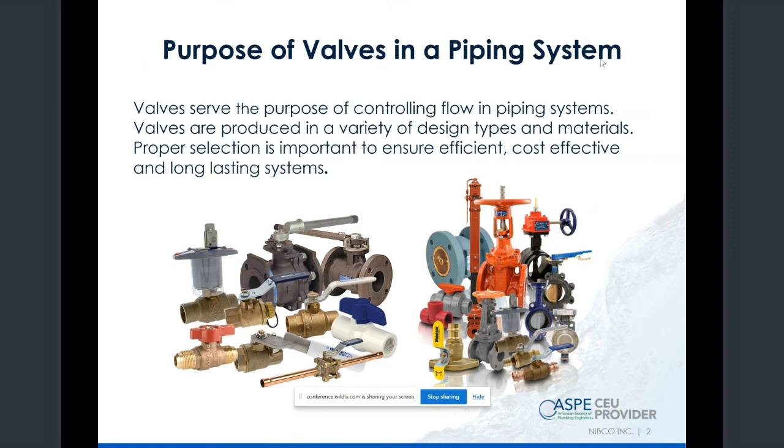All right, so purpose of a valve in a piping system. You can't just say this is a valve, and this is what a valve does - valves have a tremendous range of possibilities, procedures and capabilities. But if you're going to throw just a moniker on it, the purpose of a valve is to control flow, to control or manipulate flow in some way. So when a valve is in a pipeline or a line of any kind, there's a specific reason, and overall its process and purpose is to control the flow in one way or another.

So when we're asking about a valve, someone says, hey, I need a valve to solve my problem - this gets you about 95% of the way home. So what are the principal functions of a valve?

So what do we mean by controlling the flow? We're either talking about starting and stopping, on/off - you need it to start the flow and stop the flow. Do you need it to regulate or throttle? You'll hear the term throttling, regulating, or balancing. Are we trying to fine tune the flow, dial in the flow? Are we trying to take 20 pounds and turn it into roughly 5 pounds, etc.?

Are we trying to prevent the reversal of flow? Are we trying to make it so it goes this way, but doesn't come back into our fresh drinking water systems - checking the flow? Or regulating or relieving - so a relief valve, are we looking to relieve the pressure, to make sure for a safety procedure, to drain at a certain point in time, or control? That's how we would break it down if we got a few more sentences out of it.

And then the most important thing is service consideration. So once we've identified what you're looking to do with this valve, now we need to ask the most important question: what's going through the valve? What's the pressure, temperature, and media? That's the most important three questions you could ever ask about a valve.

What's the pressure, temperature, and media? How intense is it? So that narrows it down. This is a 3,000-pound gas transmission line. We're out, so now we know exactly where we're going. This is a potable water line for a residential house, just 60 pounds coming in.

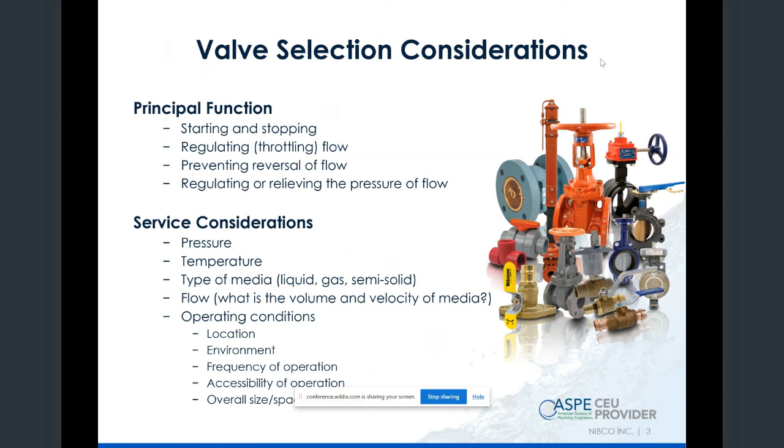So what we're going to talk about: ball, butterfly, bronze and iron, or what's grouped in as multi-turn. And then we'll briefly go over the discussion in conceptual terms of industrial fire protection. Press is in there for a specific reason, not only to bring to light that a lot of valves are adapting to press, but more importantly to understand additional questions and focuses we need to do when it's a press system.

So kicking off with the ball valve. What is a ball valve? It's a quarter turn valve with a closing member and a rotating valve, so a ball. It's almost as true as it says—there's a physical ball inside of the cavity that has a port, and it opens and closes.

This came into the market, I believe, in the space race era of the 60s. Valves couldn't always be just one thing—on, off, starting or stopping—with long material, long stems. So all that came out as a way to more manipulate a flow, create a more compact design, and be able to change out some seats for various services a little easier than its predecessor, the gate valve. The biggest thing about it is this quarter turn operation.

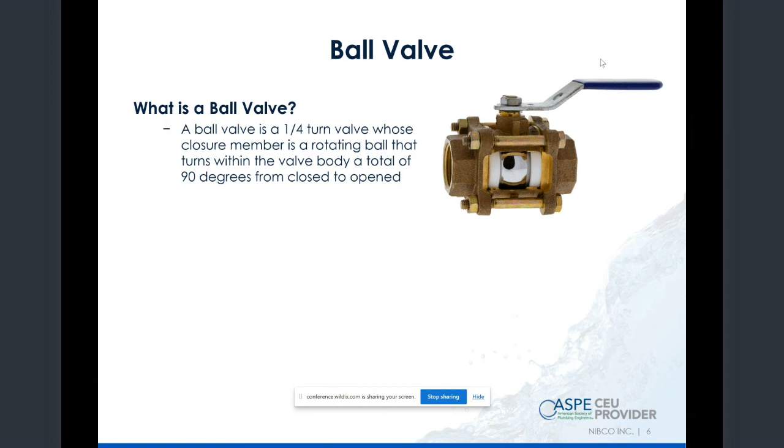So they needed easy on, easy off access as opposed to the previous, what they call a multi-turn. It did bring a lot of features, and we're going to talk about that. The ball valve gets the most attention in this because it's probably the most manipulatable valve out there, so it gets a little more credit and time than its buddies.

So applications: pretty much across the board. You're going to find ball valves in the majority of applications wherever piping is involved—commercial, residential, industrial, isolation, blow off, air lines, med gas, cryo. You find ball valves pretty much anywhere piping is involved.

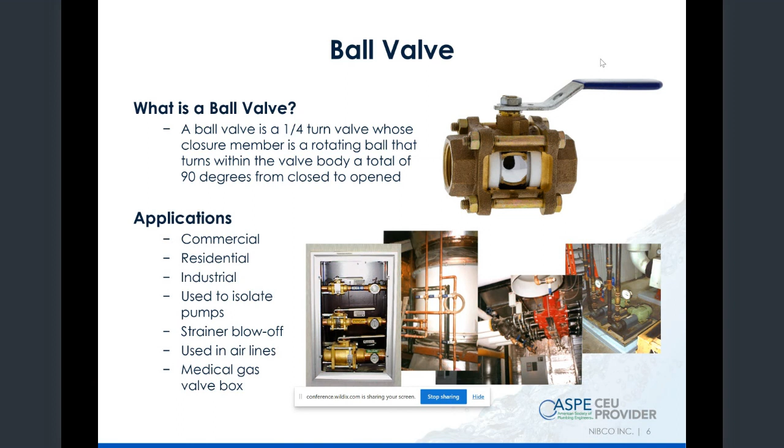So the features and the benefits: the body is probably the biggest thing. Because the physical amount of material required was reduced so dramatically, they could get a little more creative with the alloys.

Now, the most common are still going to be brass, bronze, lead-free bronzes, carbon, and stainless. But the ball valve, you can find it in Monel, Alloy 20, PVC, CPVC, plastics, high chem. So it kind of opened up the world to now make a valve to suit the service, as opposed to hoping the service can handle a valve that's already existed.

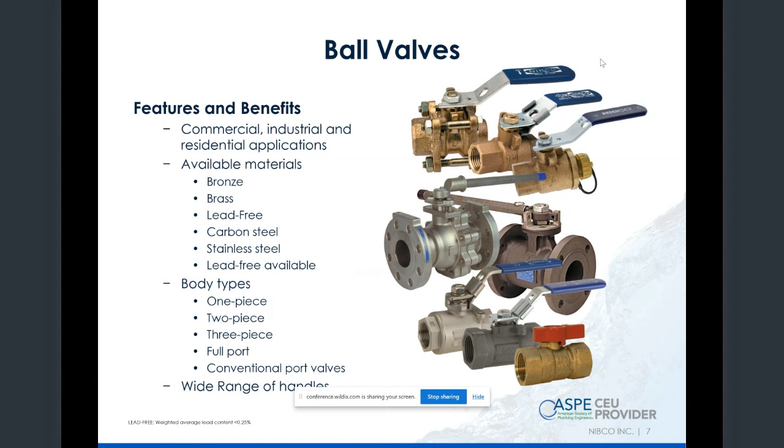Then we're going to discuss the body types. They make them in 1-piece, 2-piece, and 3-piece designs. So we're going to hit on that, and this is where you kind of pick up the why. Why would somebody ask for that? Is there a reason, or is it just because it's worked for 60 years and they don't mind if it changes? So, features.

Low pressure drop. So when we're looking at flow, the term you'll hear is full port or full flow. That's when the line size, the ball, and the port size are the same. Very low pressure drop when it comes to a ball valve. It's full port, full flow.

So your media, once it's open, the ball kind of blocks your cavities there. So you're really not eliminating too much flow. It's great for low pressure drop applications when flow is essential. It's a compact design with a lower flow profile. It's got ease of actuation, and it took away a lot of space installation requirements.

And bubble tight shutoff. Another thing it achieved - an interesting fact about valves is there's a significant amount of valves that are actually allowed to leak. Now, you'll never have a valve that's allowed to just stream out. Oh no, that's not a design feature. That's not the case at all.

But a lot of the old valves in high, severe service, it's a metal to metal seat. Now, inherently, because you have metal going right into metal, it's very difficult to achieve a complete shutoff. So what they call it is bubble tight, or a bubble allowable leakage rate. It'll be just small bubbles over a small period of time. It's never a flow by any means.

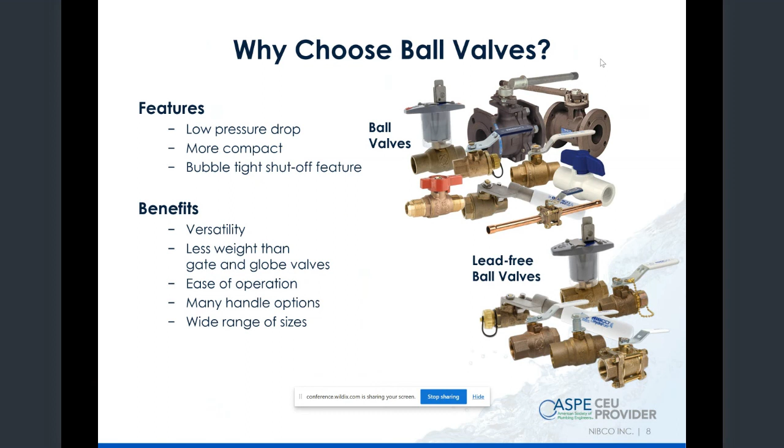It's versatile, low weight, ease of operation, handle options, wide variety. And then another thing a ball valve kind of created inherently is its own position indicator. Another great feature of a ball valve - it's very easy to identify if it's on or off.

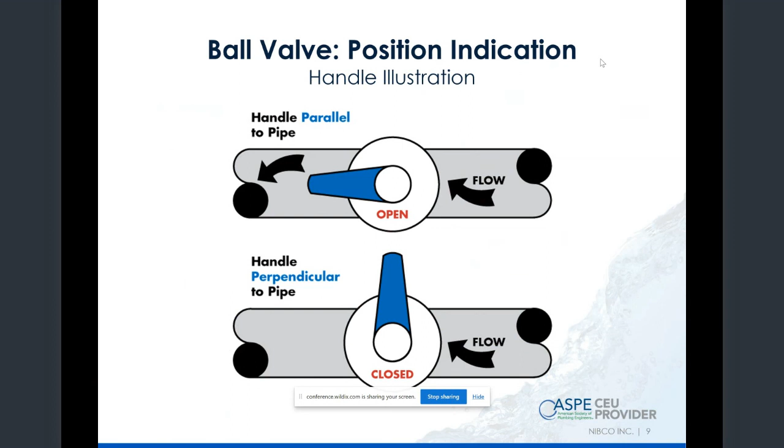If a valve - they always say the valve or the handle identifies the flow path. If it's on, it's parallel with the pipe. If it's closed, it's perpendicular. So immediately, especially in situations where it's essential to know if a valve is on or off, you're looking up in the ceiling - that's nice. It's a nice feature, kind of a built-in position indicator.

So on this side, we've kind of talked about this - port sizes. Full port: 2-inch line, 2-inch port, 2-inch flow, absolutely no obstructions. That's called full port. Full flow and full port are fairly synonymous, but the true port size itself is when the ball of the valve, or the flow path of the valve, matches or exceeds the line size. So no obstructions - full flow, full port.

Standard port or reduced port would mean that, to either save space, money, or just achieve a different body style, you're going to have a ball or a port that is 1 to 2 sizes lower than your pipe size. That's called a reduced port. In residential and plumbing valves, they kind of default to full port. But when you're talking about a 3-inch or 4-inch, or getting into the trunnion world, taking down a 4-inch stainless steel ball to a 3-inch stainless steel ball saves a tremendous amount of money and space.

So it's not that flow has to be full flow, or that we're sending a cleaning device through the line that absolutely has to not be obstructed.

Standard port is a pretty good option to save a little bit of money and space or design features. So when you hear port, knowing your line size is one thing, but what's the port? What's the flow path of the valve? Is it the same, or is it full or reduced?

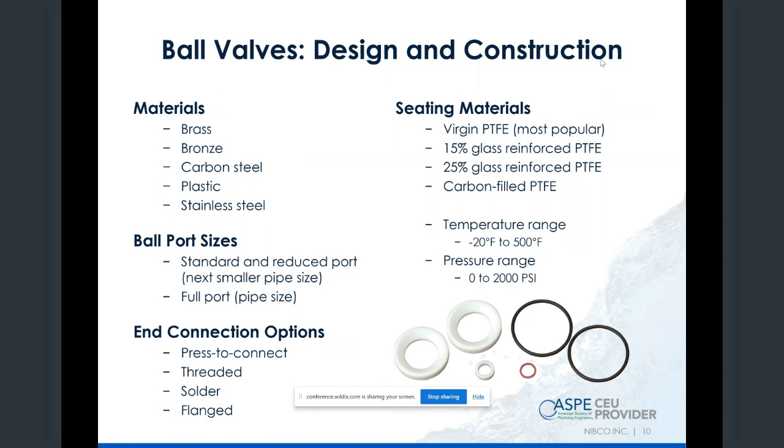Because ball valves are so versatile and interchangeable, we can achieve a tremendous amount of temperature ranges - that's like a standard range, but we can go all the way down to cryogenic, -300, if we need to. Pressure ranges are most of the time going to be 0 to 2,000, but when we get into more industrial valves, we can easily achieve 5,000 pounds with a ball valve, 10,000 pounds in some cases, especially for small instrumentation valves, etc. So the ranges get quite a bit, but you've got to make sure you have the right combination to get there.

So I mentioned trim - trim is the overall grouping of what we talked about. What's your ball made out of? What's your stem made out of? And what's your seat made out of? Most of the time, especially in the Nibco world and the commercial and residential space, we're either asking: do you want standard trim, lead-free trim, or stainless steel trim? That's the vast majority of the trim codes we're talking about.

Now if we get into trunnions or gate valves, or especially the forged small diameter gates, welded checks, then the trim combinations become astronomical. But that's all we're talking about - we've identified the body of the valve, and when we're talking about the trim, what's going in, what's the guts, what's the combination of material inside of that valve?

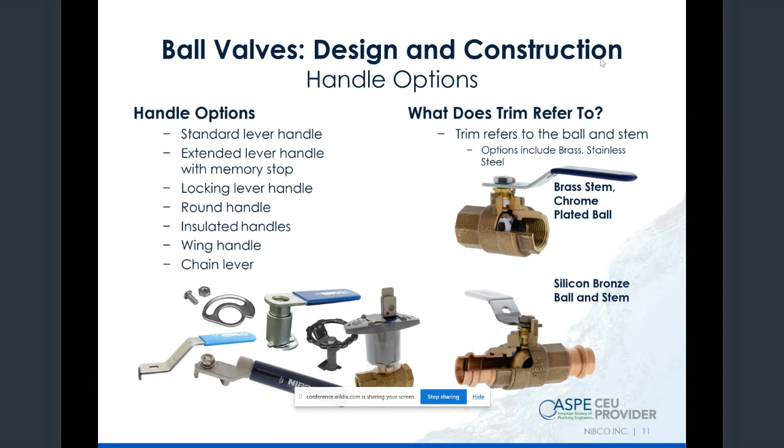So that's when someone says, what kind of trim, or I need stainless trim - we can do a bronze valve with stainless inside. That's the trim, inside of the ball itself, once we've already identified the body. So we're going one piece, two piece, three piece design - overall they follow kind of the same rules.

We've got a packing - when we say adjustable packing, it's because the stem itself needs to be made blowout proof. Blowout proof is a term you see as a feature, but it's actually required. A stem has to be fed through the body of the valve, and it's got a little lip down here that it cannot pass.

Unfortunately the reason that comes about is before, they would take a ball valve, slam in the ball, slam in the stem, hopefully lock it down and move on. And that stem actually became a deer slug coming out of that thing. If the valve malfunctioned or the pressure got too high, the stem itself would actually be a projectile coming out. So we need to feed that stem through the body cavity, and it's mechanically impossible for that stem to come out of that seal.

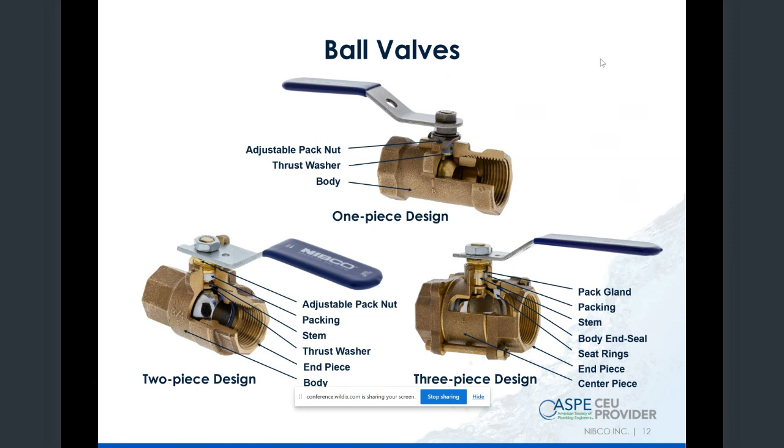That's called a blowout proof stem. It cannot shoot out of the top. To make that so, we've got to pack it in, because if the stem can get through, media can get through. So we've got extra seats or packing, which are just small versions of seats in there that we have to screw down to keep that media from squirting out. And then we've got a body seal to keep the packing safe, and then seat rings, end piece, and retainer. We'll go into that in more detail, but ultimately a one-piece, two-piece, and three-piece is generally the same construction.

So, one piece design. Why would someone want a one piece valve? It's great for low leak, zero leak, elimination of leak paths. All valves are inherently built to not leak, so you got to either trust it or you don't. But especially in chemical applications, high industrial, steam, higher pressures, this just eliminates yet another leak path.

When we say a leak path, anywhere something is joined, there's an opportunity for the media to leak out. If you thread something in, if you put in a stem, there's opportunity for a leak path. And to get a ball in there, we've got to drop it in and seal it shut. So that's considered a leak path. We've eliminated that. Now, what did we sacrifice?

We sacrificed the ability to be full port. Because there's no opening to the body whatsoever, the only way to create that is to take a valve and drop in a ball that is normally double reduced, but we can do a reduced. We have to take a ball that's one size lower, drop it in after we get the stem in there, and then mechanically seal. So instead of having a retainer assembly that we can just screw on, we've got to drop it in there and mechanically seal. That's the sacrifice of a one-piece valve. You eliminate a leak path, but you eliminate a tremendous amount of opportunities to maintain, to service, and to have a full flow or full port situation. But in chemical situations where they're not running the line full throttle, they're more worried about what's going on in it, it is a great option for that.

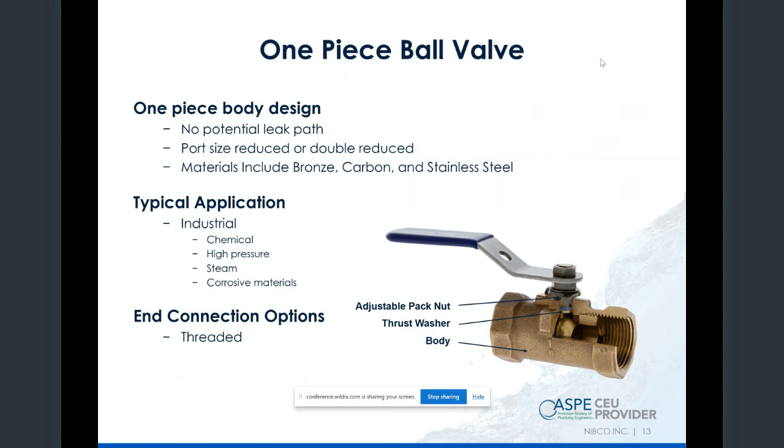So two-piece. Two-piece is the majority of the designs. It's a body assembly and what's called a retainer assembly. Why it's a great design is because we take a body, we can pop off this body, or at the manufacturing level, the retainer assembly is off. We can put any kind of ball. We can keep it full port. The seat goes in, ball goes in, put another seat on, and screw it shut.

So the misconception is that this is for us out in the field to take on and off after the fact. That's not the case at all. When this is mechanically joined at the factory or manufacturer level, it's screwed in with such force that it almost physically welds the threading shut. So if you were to pop this body seal with a wrench, you would absolutely eliminate some threads. Some people can do it, and they're right.

So then why on earth do you sell seat and seal kits for it then? Well, you'll see it on the next slide. Technically, you can maintain this valve, but the term throwaway is a naughty word. At the end of the day, if you're going to take apart a two-piece, 1-inch ball valve, the cost, labor savings, and peace of mind of keeping your warranty intact is just replace the valve. Don't go try to break the body seal. Don't try to repack it yourself on a two-piece valve. So that's more for the manufacturing benefits of allowing full port, in and out, easy design, quick assembly, easy to cast, etc. You'll find this in every application: potable, HVAC, steam, gas, fire protection, and limited chemical.

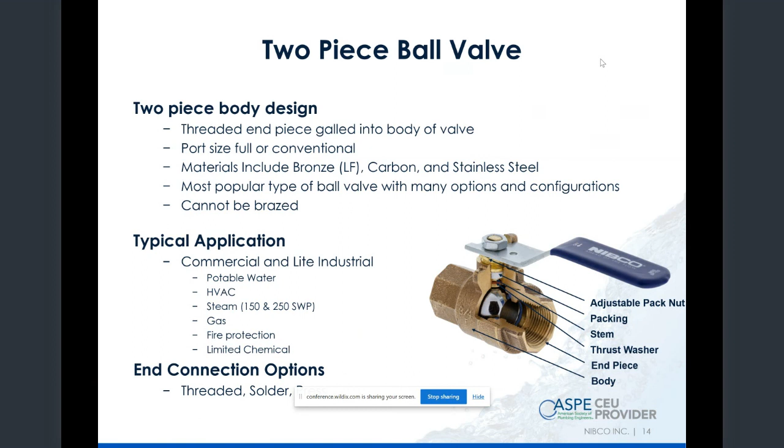The chemical is going to go kind of bipolar, we'll see on the next slide. So three-piece design: an end connection, end piece, and center body section. So why would somebody want this? Chemical will either want to go bipolar on us and go unibody, one piece, or three-piece. This is the valve that you invest in out of the gate. This is the valve that you can change in the field. This is the valve that you can update and manipulate to your needs. It's extremely user-friendly and extremely easy to service.

And after the initial installation, replacement is minimal.

So the end pieces can stay in line, these 4 bolts are taken out, you slide out the body center section, and now you have complete access to the entire valve.

This is why we sell seat and seal kits, this is why we sell replacement parts. Because if someone is in a high chemical application, there's no magic valve on earth that just handles it forever, and if maintenance time is important, a 3-piece valve is a great initial investment, and you can service and maintain this valve. Potable services like it too, because you can maintain purity, you can go in and clean out the cavity. So that's the serviceable valve, that's the investment valve, and it's great for inline maintenance.

You'll find it in many applications, primarily high abrasive, high attack, or potable services, and med gas. So med gas, I'll talk about real quick.

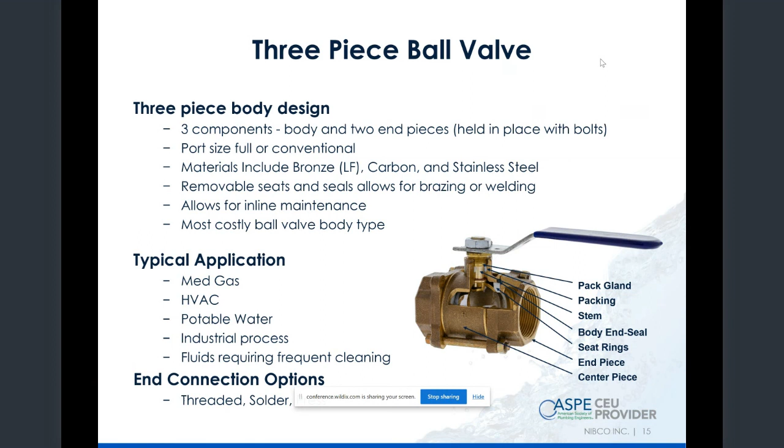So, dead horse at this point on the ball valve, but it just gets a tremendous amount of credit - it's versatile and low pressure. And the handle designs created kind of a Frankenstein - whatever you need a valve to do, to lock it up, to throttle it out, chain wheel, we can extend it easily to get outside of insulation. So all those questions of where it's going and what it needs to do - sometimes we can take the exact same valve and turn it into a completely different process. That's where ball valves are the biggest focus - most modifications, most updates come to ball valves.

So, not recommended for throttling - those who've sold some will ask, why do you sell memory stops? Why do you sell a device that locks that valve into a throttle position? When we talk about throttling, we mean it's not fully on, not fully closed - it's being used to manipulate or balance the flow. A ball valve is able to achieve that, and you won't inherently ruin it by doing it. But if that's the purpose of the valve, this isn't your ideal valve, because that ball, when in full flow position, is a fantastic flow path. In a throttle position, it's a very difficult flow path.

You've created a cave, and whatever's going through that valve is subject to attack the body. So you're manipulating the flow to cavitate or swirl around or create its own path inside the body itself. If you ever get a valve back that's pitted right here after a couple years of service, it's ripped out here - but the majority of the time that's how that valve was used, because you manipulated that path to take a way it shouldn't, and it just annihilates it. They can do it, there's no inherent problem with throttling with it, but if that's the overall purpose of the valve, you're not going to get the lifespan you want out of it.

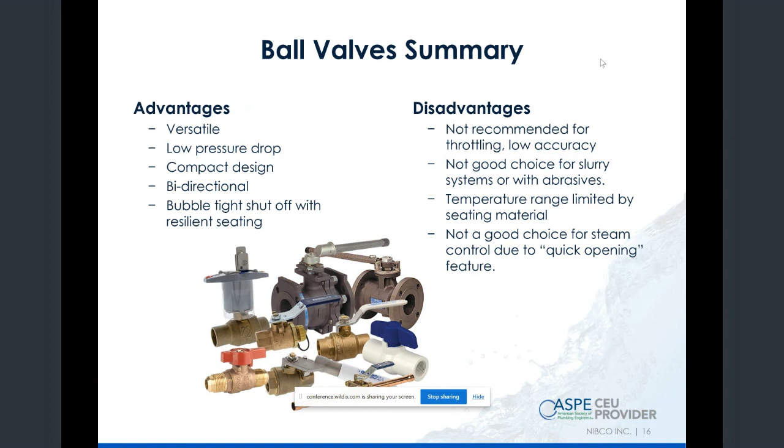All right, so now we're going to get to butterfly valves. For 2-inch and below, ball valves came in.

The butterfly is also a quarter turn valve, so it's 90 degrees on, 90 degrees off. Just open, close, open, close. Great for throttling—most manufacturers default to a throttling capability. When you see someone ask for a 10 position locking handle, this is what they mean: there's 10 selected positions for throttling that you can take that lever and leave it in.

Why is it great for throttling? Because when we open and close a butterfly valve, we're not manipulating the flow. We're not sending it to a different part of the valve or to a cavity. We're just deflecting or limiting the flow. Great for throttling. So the butterfly valve came in.

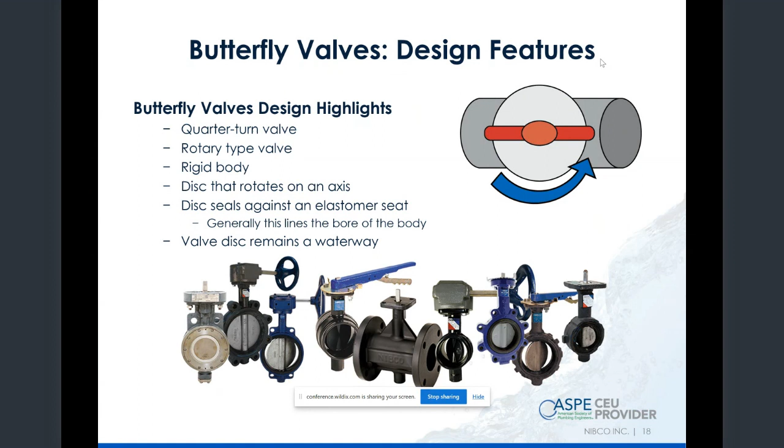It's got a rigid body—it's a sturdy, low profile valve. The physical disc mates against the body. There's definitely a seal; you're not going to go iron to iron. The seal itself is either molded, injection molded, vulcanized, or cartridge style. The disc just mates right into the body seat. Very simple design, achieves bubble tight shutoff and a very low profile.

Flow can still be achieved because it's not going to slow down that much flow, but you cannot get a full port. Most available materials, like the butterfly valve or ball valve, because we reduced the profile, it kind of expanded the availability—primarily to cast iron, ductile iron, CPVC, or lead-free. That's just pay to play because a lot of it's inherently lead-free. Fire protection and high performance too.

When you get into like ABZ, which focuses all on butterfly valves, that's where the world's your oyster. If you need Monel, high alloy, high purity, aluminum, I mean they make some wild stuff. And with the seats, we can pay to play and make it to your service—you've got high FDA purity, white Buna, food grade. That's where butterfly manufacturers make it very easy to create your own Franken valve to get exactly what you need.

So the butterfly valve came in and did what the ball valve did, only we can do it in much greater sizes now. Typical end connections are wafer, which just mates right in between two flanges.

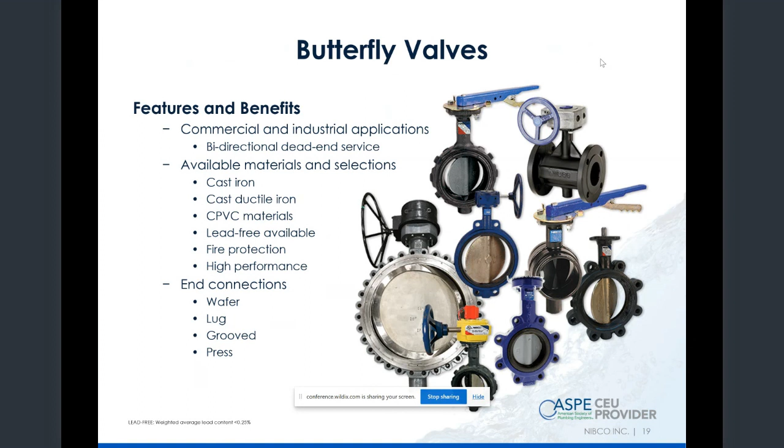Lug type is compatible with 125 and 150, flat face or raised face. Then we get into the higher materials, and ABZ will get into the 150, 300, 600, sometimes 900, et cetera, and double flange.

Groove type—you'll see a groove butterfly valve has a different kind of body construction, so the disc is contained in a sleeve. You'll see the disc, EPDM, it's kind of all sleeved in, so it's a different design, not quite this design. You'll see the disc almost has the same jacketing material as itself.

And then wafer style—this one is mostly going to be in like the 125.

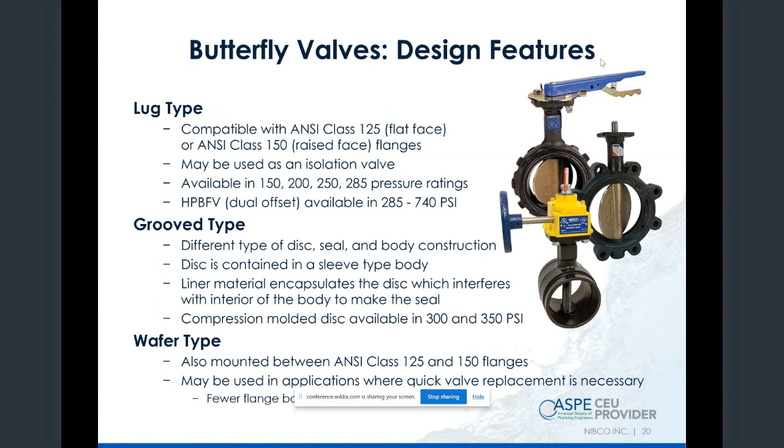You can do a 300 wafer. They make 600 wafer, but the higher pressure lug style kind of takes over in that department.

So on the discs, I'm not going to get too crazy, outside of a term that comes up a lot, which is offset. So you might hear I need a double offset or a triple offset. What we mean by that is we're going to take the disc.

Most of the time it's just a shaft and a disc, nice and aligned, easy on, easy off, straightforward. Now if we offset the disc and the shaft a little bit, we're going to manipulate the flow path for an ease of seating. You'll find that in the high performance world. High performance, what do we mean by that? It's a general term, mostly performing with steam or higher pressures.

And what we're going to do is make it unidirectional, so we're not allowing this butterfly valve to go either way, because we're going to create a little seating niche. Inside what they call a retainer, or the body inside here, we're going to create a little groove or niche so we can manipulate the media to push on the disc in a different way. We're going to offset it so it forces it into the seat, giving us higher sealing capabilities. Then with triple offset, we're not only offsetting the disc, we're offsetting the angle.

So we're really driving it home. If you hear triple offset valve, it's most likely going into a facility with high pressure steam. If it's a true steam application for a butterfly valve, at minimum look at the double offset, but primarily you should look at the triple offset. That's where you're going to see those.

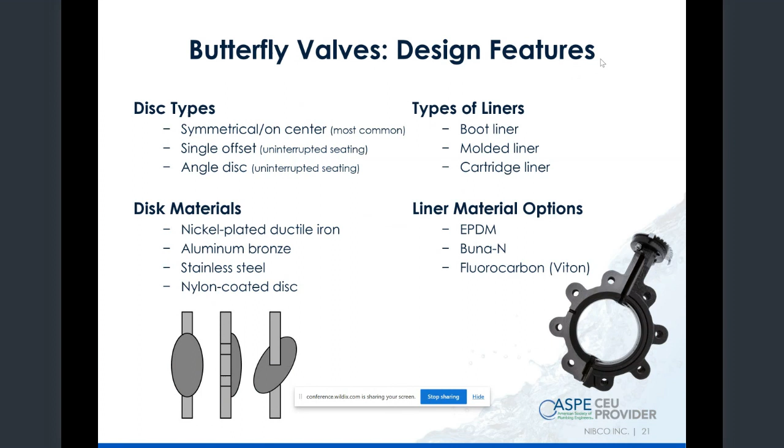So operating life provides maintenance-free cycles. Unlike some previous valves with a lot of mechanics to them, a lot of moving parts, a lot of areas to trap debris, a lot of valves have a maintenance cycle - you got to cycle it, you got to flush it, you got to get that out of there. Butterfly valves create an opportunity that it's fairly maintenance-free. It can sit for quite a long time because it inherently cleans itself.

So when it's opening and closing, there's not a lot of places for media to get trapped. You're not like a ball valve where you're physically grabbing the water or the steam and keeping it inside. A butterfly valve wipes itself clean, so you're really wiping away your seat. It's pushing off all the gunk that accumulated here, and now it's going to send it nicely down line. So there's not a lot of snags, or things that can just come up on a valve and all of a sudden it's not working.

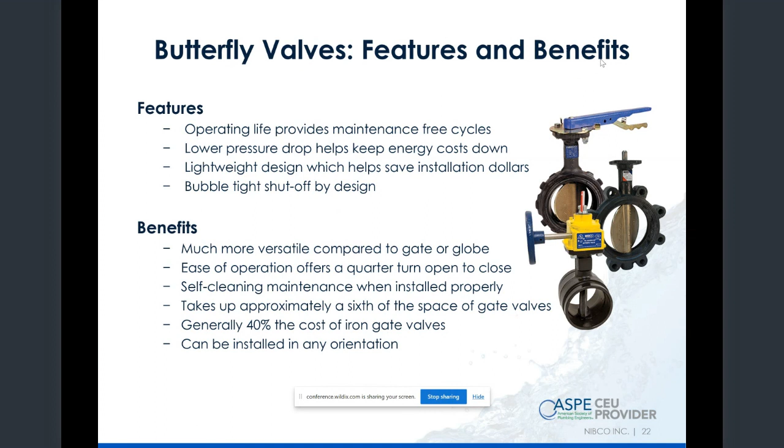All right, bronze and iron valves. So these are grouped in what we call multi-turn. Multi-turn check valves get thrown in there just because they needed a home, and that doesn't really apply to them. But multi-turn is pretty much just that - it takes multiple turns to operate these valves. So in this family is check valve, gate valve, globe valve.

Available materials depend on which angle you're looking at it. Most of the time on the 2-inch and below, you're going to be looking at bronze or some brass for very, very light residential, and then carbon and stainless steel in the flanged end and the industrial and API worlds. End connections: thread end, solder end, flanged end, but you can have socket weld.

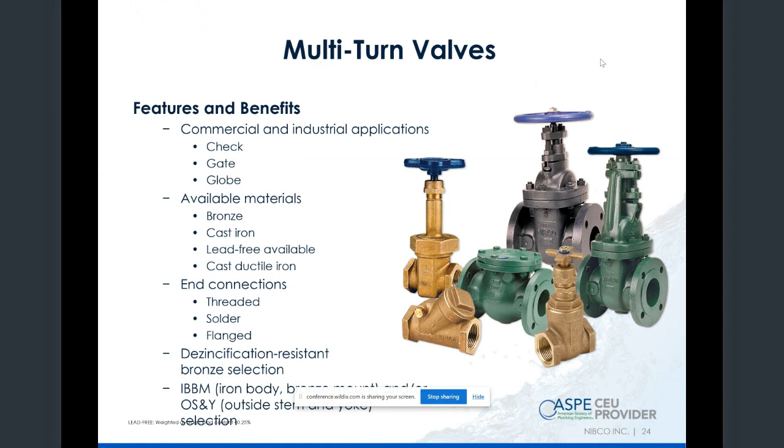You can kind of get into those worlds as well. DZR, so they play in the potable arena as well. And then we'll talk about IBBM and OSY.

A gate valve is probably one of the oldest valves out there. It didn't look like this, but the concept was there, just a physical gate coming down to isolate the media. It came about from hollowed out logs used to transport water. They'd cut a little niche in it, slam another piece of wood in there, wedge it in there. That's where the gate came about. So a gate valve is just that, just a gate.

The biggest thing about a gate valve, if you take away one thing, is that it is for absolute on and absolute off service. You absolutely cannot throttle a gate valve. If you throttle it or leave it in a partially open or closed position, the lifespan will be nil. It'll work for as long as you want it to, but the amount of abuse is severe. So hopefully you hear this.

They'll say, well, this valve doesn't work, I can't deal with this in my house. Well, good, you're using that completely wrong. That gate valve would have lasted a year, and then you'd have gone to turn it, and that's all you get, because you distorted your stem so hard.

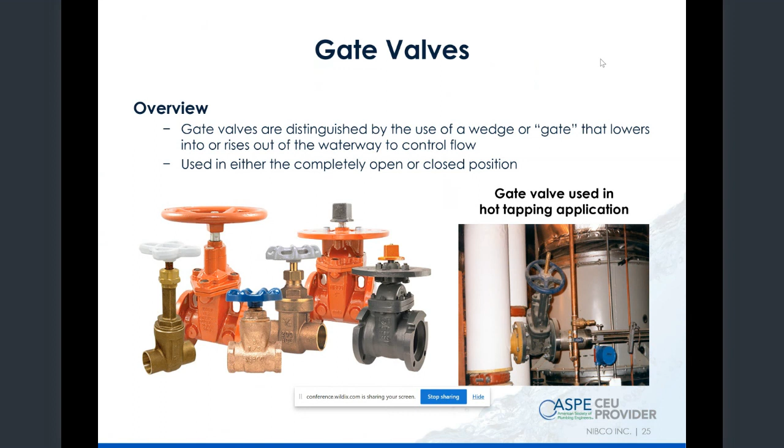So gate valve is on and off. It's fantastic for steam, fantastic for severe applications, higher pressure, higher temperature, but it is absolute on or absolute off position. No exceptions with the gate valve.

Now, another key term to remember if you hear it is union or bolted bonnet. So if you're going to maintain this valve, you're going to put it on a good schedule, keep a good maintenance schedule going for this gate valve. This is called a union bonnet. So the top works is here. The bonnet is a union assembly.

So it's very easy to maintain. That stays in your line. You can clean it out, defoul it if there's something going on in there. Take this out, change out your disc, change out your parts, maintain, lubricate, whatever you need to do, slide it right back in there and put it in. So when someone says a union bonnet, this valve needs to last a lifetime, we get a lot of slurry through this line, I'm always cleaning it, go for a union bonnet.

Then there's bolted bonnet, mostly iron, the larger diameter stuff. And then there's also a screwed-in or threaded bonnet, similar to the two-piece valve. That's kind of screwed in there and set in there for longevity. You can open this and maintain it, but don't ever do it lightly - if it's a screwed-in bonnet, they mostly are setting this one and forgetting it. They'll operate it, but they're not looking to maintain it. It's pretty clean, potable water. They're not looking to open this up unless they absolutely have to. That's where a screwed-in bonnet is a little better friend for you.

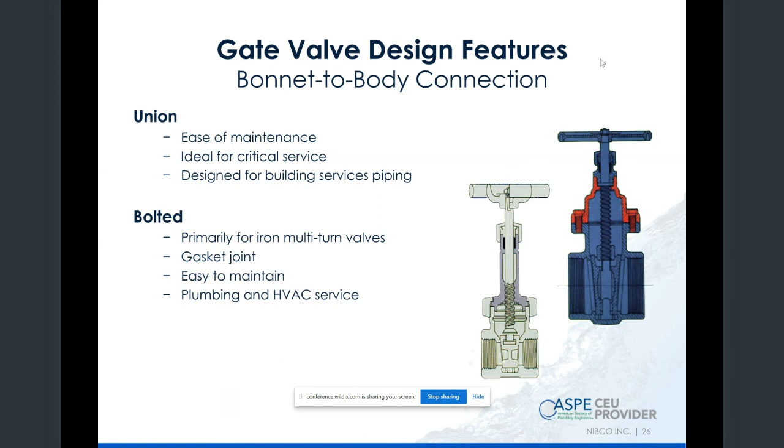So, rising and non-rising and OS and Y. Another term: I need an NRS valve, I need a non-rising stem, or I need a rising stem, or I need an OS and Y valve. What they're talking about is the physical stem itself. If the stem is a rising stem... well, let's start with non-rising. So why wouldn't all of them be non-rising?

They're smaller, they're easier. One of the biggest things about a gate valve, and why we pointed out how nice it is when a ball valve shows us which way it's going, is that it's a non-rising stem - that's the drawback. You have no idea if this valve is open or closed. Fire protection won't allow it. Critical building services, maintenance cycles - you have no idea if this is on or off. But what you do, if I don't care, it doesn't matter - I'll know because the water will be there or it won't.

So then, good, you can save space, you can save materials, you can save mechanical, it's lower cost - excellent, what a great solution. Well, I need to know if this valve is open or closed, so it's a rising stem. It's very easy to tell if that valve is open - the stem is exposed, you can see the stem.

So now I need an OS and Y rising stem. Okay, well, what's the difference? On an OS and Y, you can put indicators on top - it's everything outside screw and yoke, everything is exposed. So the screw itself is what rises.

Your hand wheel stays in the same position, but now your screw and stem is exposed. Again, very easy to identify if this valve is open, very easy to identify if it's closed. So those are big takeaways there.

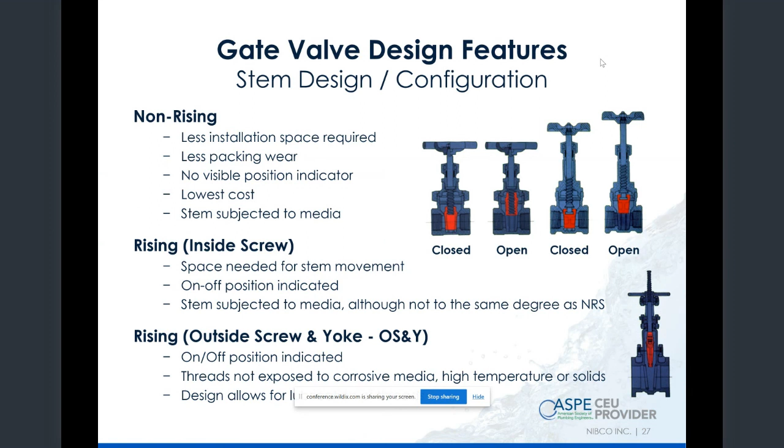When someone asks, can they use a non-rising stem? Why do you need to ask that? Because sometimes it's very important to have a visual indication, or they have a post indicator, etc. If we throw someone an OS&Y or a rising stem and it doesn't matter because they don't have space requirements, that's fine, that's rarely going to come back. But if someone says I need an OS&Y valve, or gives me a part number that is a rising stem, I'll ask: we've only got non-rising, will that work? Because there's no visual indication. I'll ask on that one. The other way, if they have one and it's just a little long, nothing too bad is going to come of that.

So the gate valve - why is it still in existence? It sounds like it's just getting beat up by butterflies and balls. But it's still great for high impact service, high temperature, high pressure, and you can manipulate these valves. You can add features, do hot tapping, do bypasses, easy for a chain wheel. Same as a butterfly, but it still has a tremendous amount of capability. It's easier to actuate, or use a gear operator for critical service. So they're never going away.

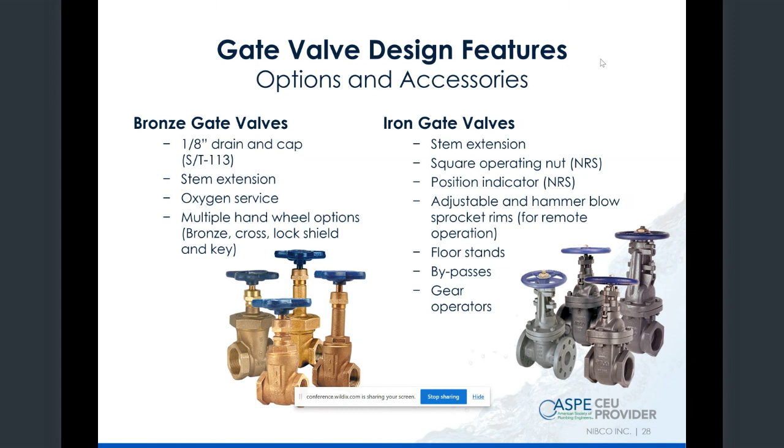An iron gate valve has a home forever. In these long services, all they had in the beginning was a gate valve, and now we're saying well, there might be a better way. But there's a lot of things a gate valve does that you just can't replace, so they'll always be there. Great for drawn off, great for full flow - the gate's completely removed from your system. Great, it's got metal, so you'll see metal to metal on both sides.

Why is metal to metal a great solution? Because it can handle a tremendous amount of heat, a tremendous amount of pressure - not tremendous obviously, within the parameters of the valve. But there's nothing soft, there's not a soft material in there getting beat up. This will have an allowable leakage rate, but it's great for isolation. Now, you cannot throttle it.

Now the metal to metal - why now all of a sudden is it bad? Because inherently when you're slamming metal against metal, it's going to mold, it's going to bend, it's going to chip. So for a high frequency operation, your metal to metal impacts will take a beating. Seating is not bubble tight, so that's the end solution to that stuff I've been saying all along. This inherently has to be allowed to bubble a few times because of the nooks and crannies and the abuse it's taking. At the end of the day, if you're just using it for on-off service and there's nothing too crazy about it, you're adding a lot of extra effort.

When we say automate or actuate, that means something that automatically manipulates your valve open or close. Very, very, very difficult to automate a multi-turn valve. That's a specialty we don't deal with, we don't do it. Very easy to automate a ball valve too, which is very similar, just a 90-degree.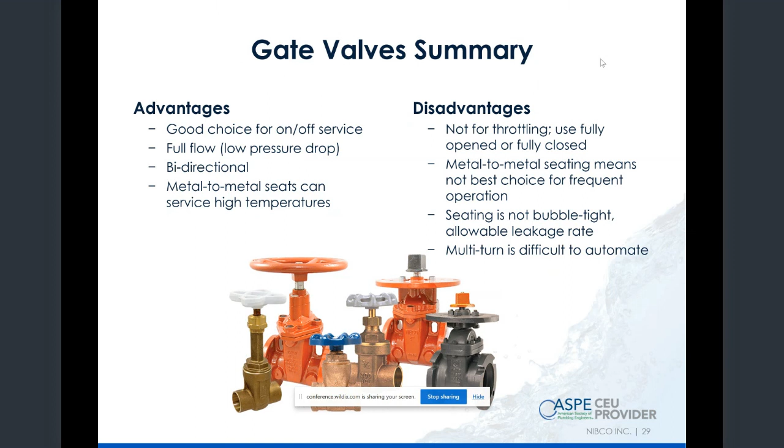So check valves - check valves come in swing, center guided, and double door types. There's obviously a few more, but these are primarily it.

Swing type is just that - it has a little disc that swings open, lets the media through, and then gravity does its thing and closes it back down. It's mechanically blocked, so any reversible flow cannot get through that. Very simple design. That way, yes; that way, no. Vertical up, sure; vertical down, no, because gravity can't do its thing - your check's going to be flapping. You'll create turbulation, people say well my gauge is going crazy down here - that's because this thing is spiraling out of control.

Then there's center guided and dual disc - for space-saving design, for larger diameters, there's a dual disc. It just has two little discs supported by a spring to help close. The thing is it's always having an obstruction, so you cannot achieve full flow, but it's a great design.

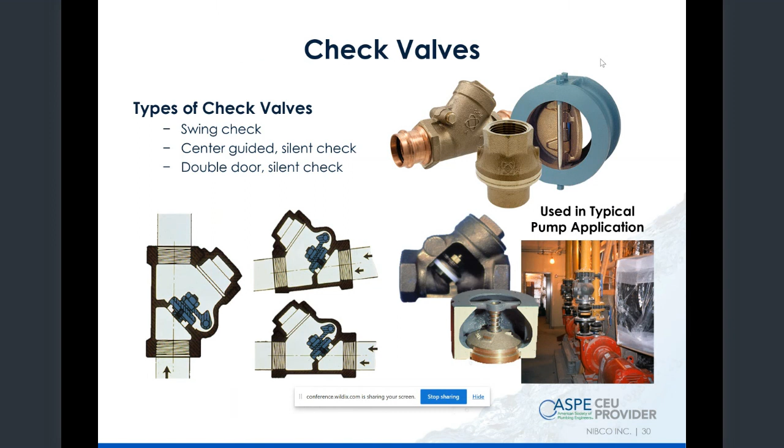The wafer design slips in. The thing about this is it's a quick closure, they call it - it slams shut pretty quick. What can happen in that situation is what's called water hammer.

So if you close water too quick, water's coming in, you shut it off, it's going to bounce off that check and then send itself right back down the line. On larger diameter material, it can cause a tremendous amount of damage.

So a solution to that would be a center guided valve. These are called straightening vanes, so it helps with turbulence. You've got a full-blown disc in your waterway at all times, but the flow is separated. It's straightened, turbulence is coming out, and then they call it a spring assist, a non-slam, or a silent check. There's a lot less chatter with these, but it eases the flow back to help eliminate water hammer. It's not going to eliminate it, but it'll reduce it, is the better word.

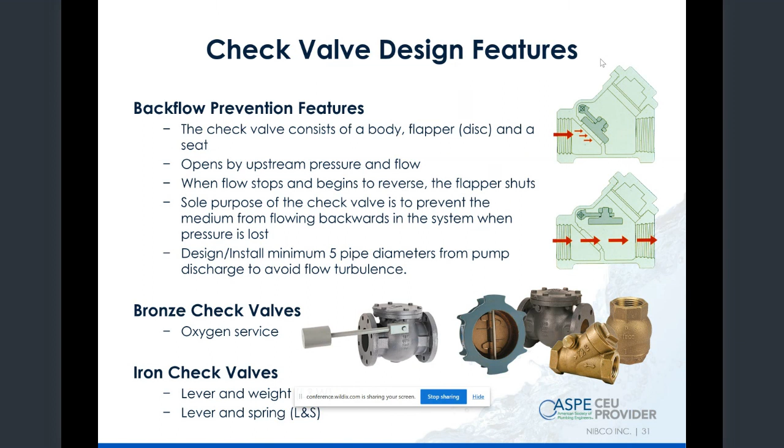And then you can assist with the lever and weight. They call it cracking pressure, a term for how much pressure it takes to open up a valve, to crack a valve. So lever and weight is a way to kind of manipulate that. It's not a science. Balance valves do that, or automatic control valves, but it can help. I don't want it always, I think there's a little bit of media to get there. That's where a lever and weight's a good option. So not too much with this.

The swing check has got the best pressure drop because it opens up full flow, lets it in, stops. You can get UL on that side, UL for fire protection. They are specified, they are identified a little bit better. Metal to metal seats, just like the gate valve, can handle a little more severe service.

And then center guided and double door checks may have significant pressure drop. They're not may, they will. I mean, you will have a lot of obstruction in your waterway, but if it's protecting a $10,000 pump, and that's the nature of doing business, it's well worth the cost there.

Hydraulic shock, that's the water hammer I talked about, and you must install the correct orientation. If you install it backwards, you have a wall, so it won't work, and that comes up more often than you'd like to believe. And there's no bubble tight seating. There isn't allowable leakage because there is no physical seat, and it is designed to open and close at all times.

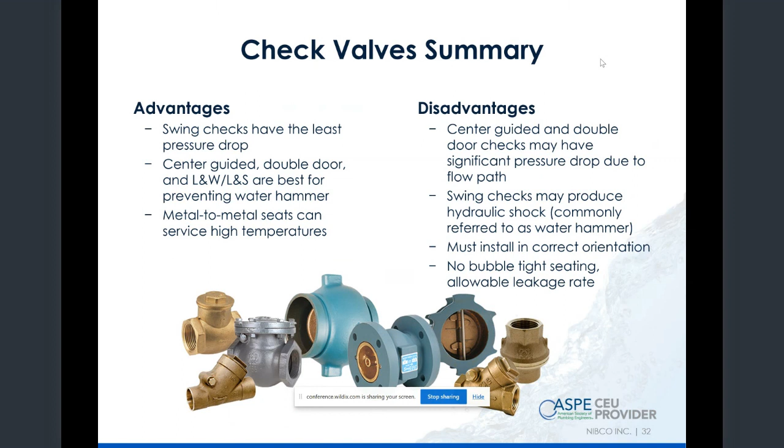All right, the globe valve. So the gate valve is getting beat up by the flow, and so what's the globe valve for? The globe valve is used to regulate. So that's where we use our regulate. This is a throttling valve. This is what we use to regulate flow. So how do we achieve that?

Well, the flow, the sealing surface is protected. As opposed to the gate being the first line of defense, just getting beat up directly and head on, you've got a globe valve now where the flow is being physically manipulated down to the cavity and vertically up. So the seat is taking it directly. That's why we can dial this in. The stem isn't getting torqued, we're not getting beat up, and it's coming head on, and we can do positive isolation, better for soft seating, throttling only. If you're using it for on-off, it'll be fine, but you're way overkilling it, and you're sacrificing your flow.

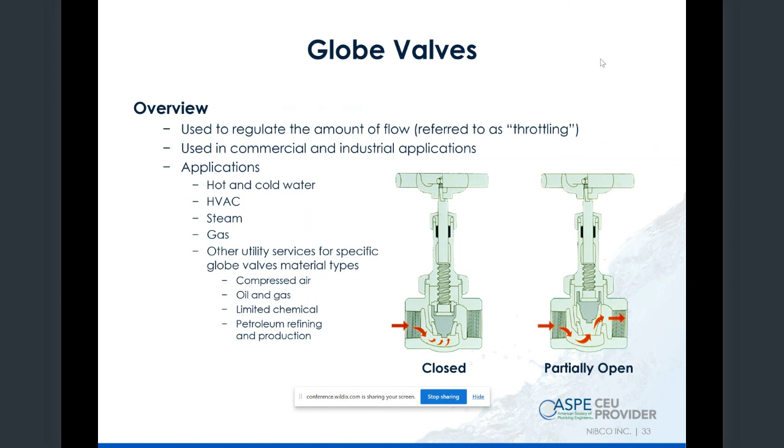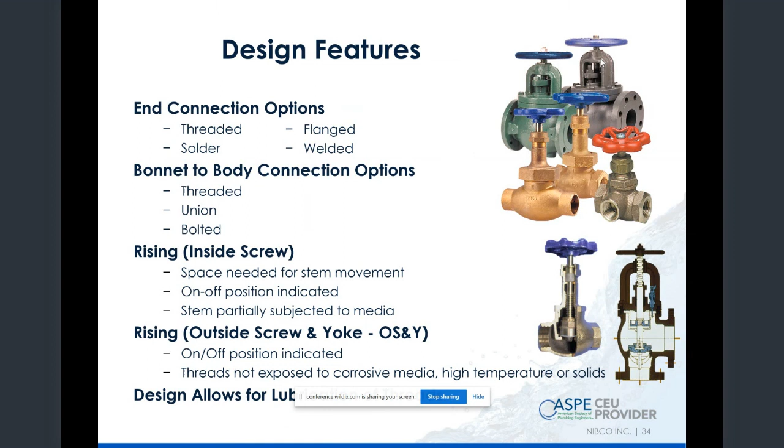So that's where the globe valve comes in. It's used in all applications. You'll see it a lot in oil and gas, a little bit of chemical, and refining, a lot of refining. Connections for all these is anything you need: thread, socket, depending on the application. And the rising stem connections are the same as the gate. So you can get a rising stem, you can get a non-rising stem, and you can maintain these a lot easier. You can kind of manipulate the seats.

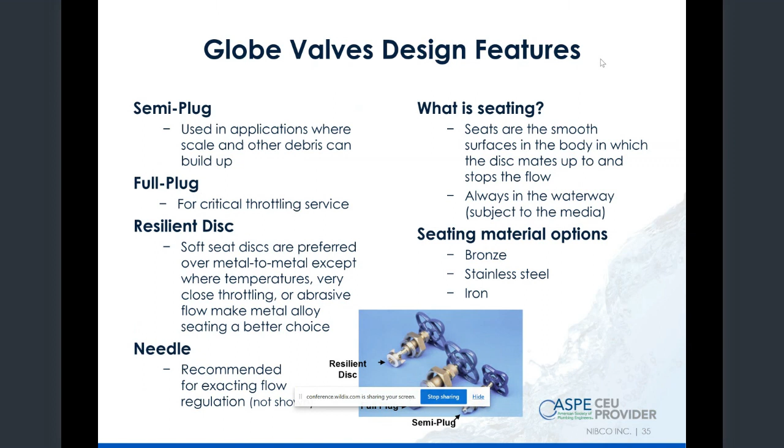I won't go too much into this, but the good thing about a plug valve is if you're really dialing in, you can kind of manipulate them to change your plug, to change the precision of the media or how it seals. If it really gets elevated into what you're doing with the globe, you can kind of, like a butterfly, start to pay to play a little bit. We don't see a tremendous amount of that in the refining world, but you will in chemical applications. You'll see them changing the plug on us.

So great for throttling. You can do bubble tight because you're coming directly down on the media. You've got a soft seat, metal to metal, same concept as before. Flow, significant pressure drop.

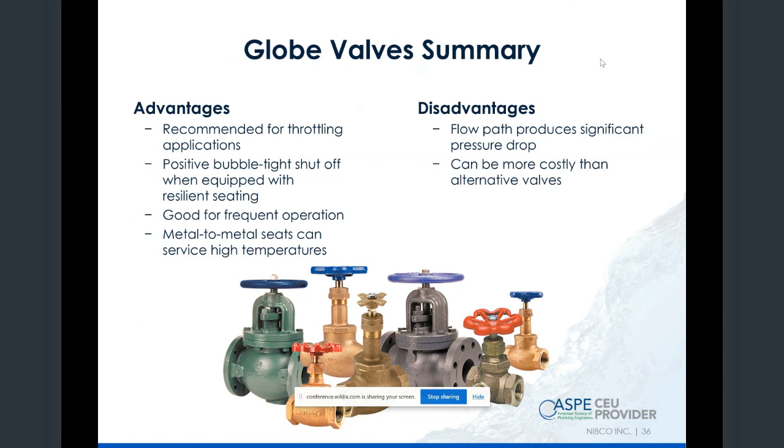So if you look at that, you're absolutely sacrificing flow. There's no way to have a full flow globe valve. You've got a tremendous amount of blockage in that flow. But as I always say, if you're complaining about the flow of a globe valve, you're using it wrong, because the whole point is to manipulate the flow. So that's kind of a good indicator. Well, I turn this thing on and it's like it drained. Well, then go to a gate valve or a ball valve, because you're overkilling that.

So we kind of talked about this when we talk about industrial. Industrial is obviously a sector, it's a segment. There's no industrial valve, but valves are tailored for industrial applications. You're going to see them in pure, either bronze on the lowest level, but mostly this is the carbon and stainless steel, flanged end, high pressures, high speeds. This is where the seats come in. The difference of a butterfly valve in a commercial application to an industrial application is significantly different. So we just briefly touch on industrial. There's no line set of industrial valves, but there's valves suited for industrial application.

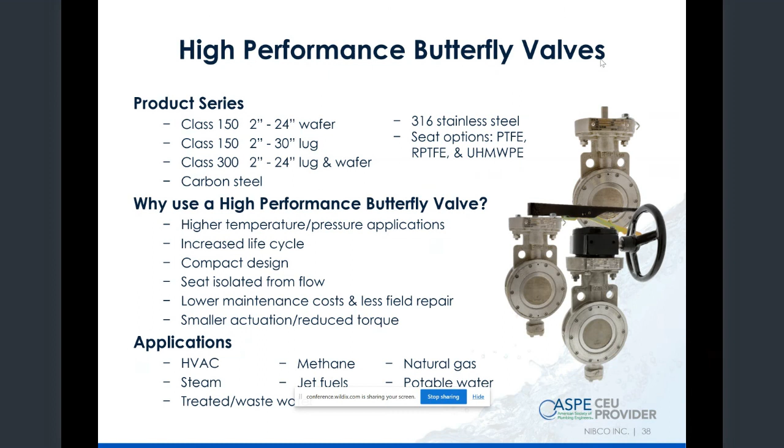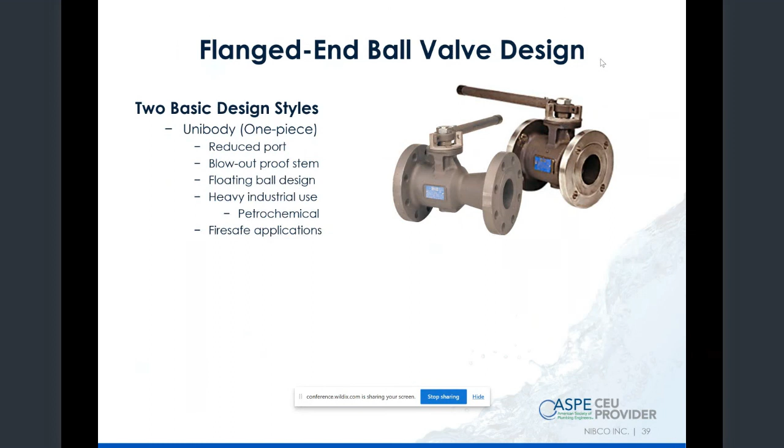Again, it boils down to those 4 questions we ask: what's it doing? Where's it going? How hot? And where's it going to be? So that's where all of these valves we just talked about, on kind of all my demos at least, were on a more residential, light commercial, light industrial level. Just now we put them into a high performance, mostly true ANSI class 150, 300, etc. And then flanged end - not too much on this, just other than you're taking that same ball valve design, throwing it in a flanged end service. If we're talking high performance or petroleum, in 4-inch and above, we're talking flanged end.

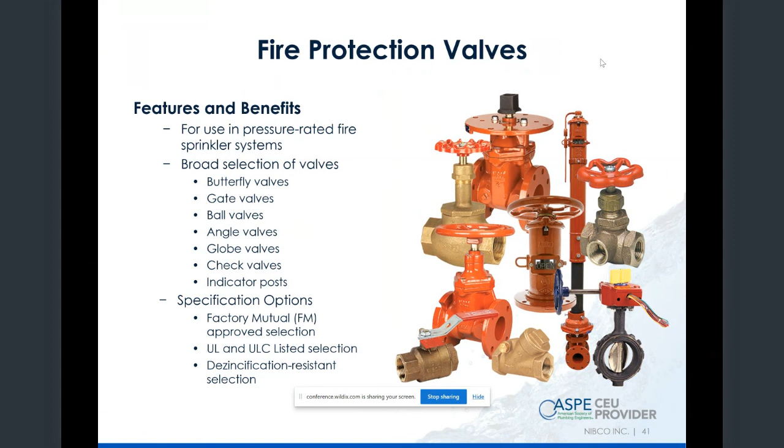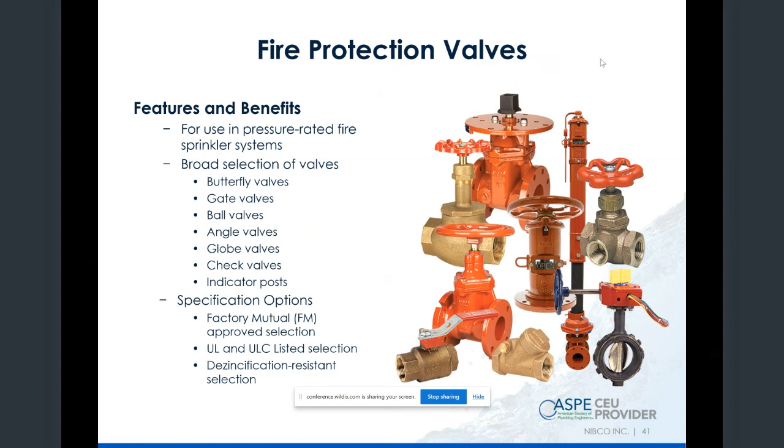All right, so this one's quick. Fire protection valve. Again, it's not a magic valve, but it's a valve that has all that stuff I talked about in the very first part. That's what this is - a tremendous amount of research, testing, and approvals going into fire protection valves. So fire protection valves are easily identified because they've got their own price sheet, their own price books. They're usually red, or the handle is manipulated red. They'll have UL, they'll have all sorts of codes. But the good thing about fire protection valves is they kind of overkill it in a way. They're AWWA, they're NSF for potable water, they're UL/FM for fire applications.

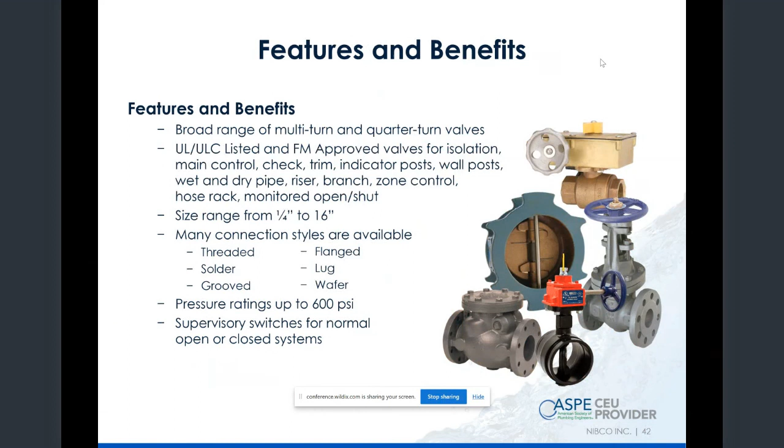So sometimes fire protection valves get poached. If we need a potable water gate valve, sometimes we'll poach a fire protection one because it's got the approvals. Don't ever send something into fire protection that shouldn't be in fire protection - it's not going to hold the approvals, it's not going to hold the standards. Yes, it might work, it might be the same valve, but on an inspected true fire protection system it's not going to apply, it's not going to have the approval. So don't send things into fire protection that don't need to be. If you need to steal from it, you're usually okay - you're just overkilling it, or taking it for some of its ratings. Features and benefits are that it's specifically tailored and approved for fire protection service. There's no specific feature I can sell on it other than it's designed for a fire protection service.

So press valves, why do we bring them up? A lot of things are involved in the press on residential, commercial, mechanical applications. I bring it up because it's good to think about, but the most important thing is always remember: if you're putting press ends on it, you can't Frankenstein a 300-pound globe valve to be pressed in and just think that it's going to maintain all of its capabilities. You're now sacrificing it down to the weakest link.

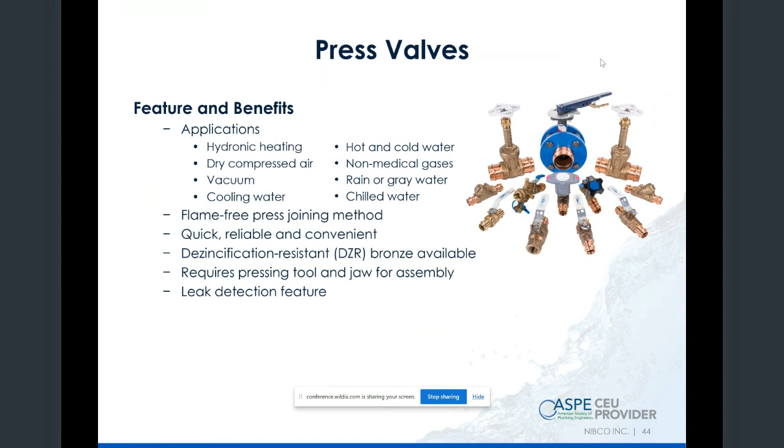So there's a great question in Butte. He said, well, why is the FP 600 a 600-pound valve? And then now I pull these out of the box and they're 250 pounds. Because we need to rate it to the lowest level, to the weakest link. So press ends are usually rated between 250 to 300 pounds. You can't achieve your 600-pound rating on a press end. So I bring it up for two reasons: it's new, fancy, and exciting, but also always remember, you've now derated that valve down to a press system. It can't maintain its industrial properties because you threw a male press adapter in there.

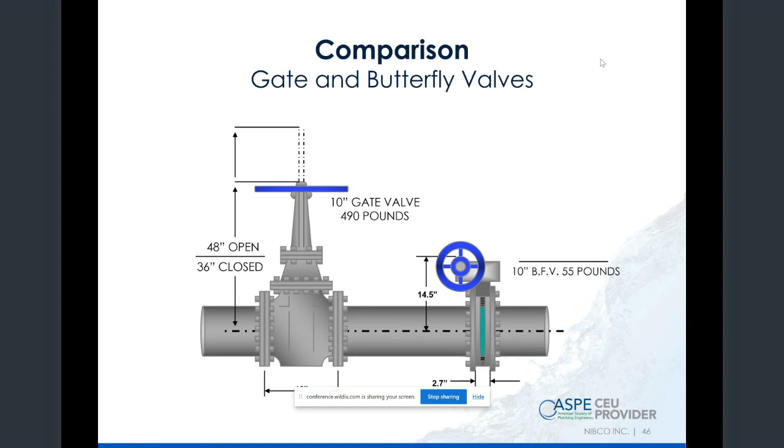490 versus 55 pounds, and the flow - we throw the globe valve in here on the flow rate chart just to prove that if someone's complaining about the flow rate of a globe valve, they're using it wrong. So the poor globe valve just gets beat up.

This is the sacrifice you're making when you need to throttle your line. And if you need to throttle, there's no question you're going to do it. But a butterfly valve versus a gate valve, you'll see - for small diameters they're pretty neck and neck. The separation does come, and you're saying, well, there you go, I'm not getting the flow I need.

That's where the good questions come in - what's actually going through this line? Very rarely in a line do you have an application where they're running full throttle, running 600 pounds at 100 degrees and nothing will take nothing less. Very, very, very rarely.

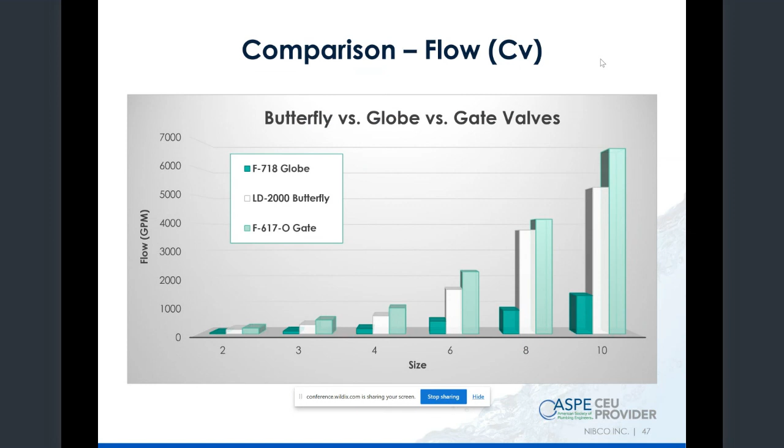So we have good engineering - we can do mock diagrams, mock flow charts, we've got good pressure temperature data. We can cut it off and prove that most people are hanging out in this zone anyway. So if there's a true concern about flow rates, let us know, let your manufacturer of choice know - they can either prove or disprove it. Sometimes I'm like, wow, yeah, you absolutely are right, good call. But most of the time it's going to be, well, this is your application.

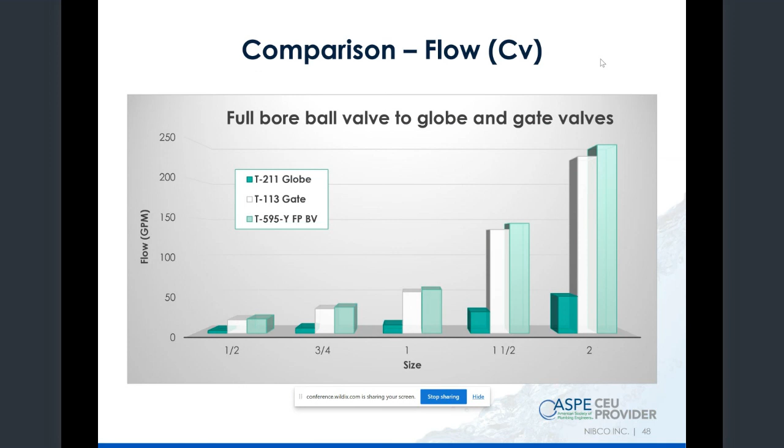On a 2-inch and below, ball valve versus gate valve - same boat. The globe valve again, poor guy, not having it. Gate valve versus ball valve on smaller diameter is very interchangeable, with very limited flow sacrifice. So that's just when it comes down to it. And if there's ever a question on true flow, let us know - we've got charts, we've got write-ups, and in some cases we can help confirm you were absolutely right, just stick with that.

Well, that's all I got.